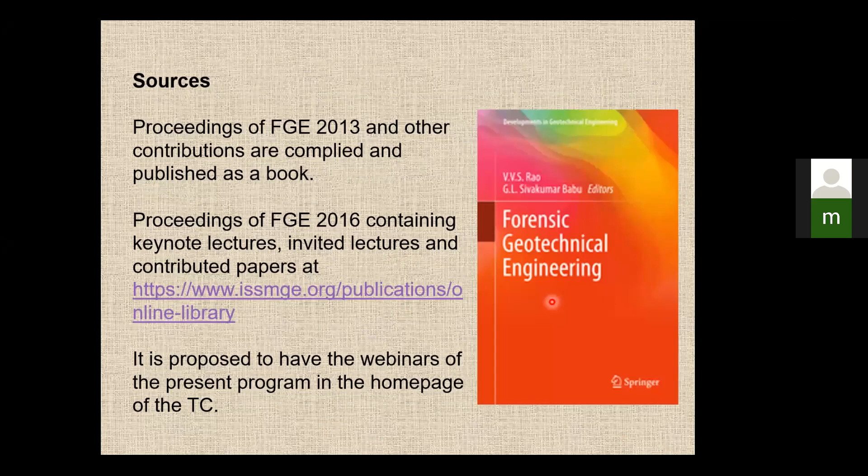So what do you mean by this forensic engineering? Okay, so forensic relates to the forum or the marketplace, belonging to courts of law, pertaining to... the issue is that

Like if it is something which is public, so people try to make some noise. If they want to talk, they can talk. I can keep quiet. Okay. Yeah.

Okay, thank you. So the thing is that forensic is something that is more connected with the public. So they try to discuss it in the court of law, and it has a legal framework, and there could be discussions on what went wrong, why is it, and who is responsible. So that is called forensics or forensic engineering.

So forensic engineering is nothing but engineering connected with assisting the legal system with fact finding. Because the legal system alone cannot identify what went wrong, because it's technical work. So the engineers have to help them understand what is this failure, why it has failed, what is the engineering failure here. That's a general thing, but ASCE has been quite proactive,

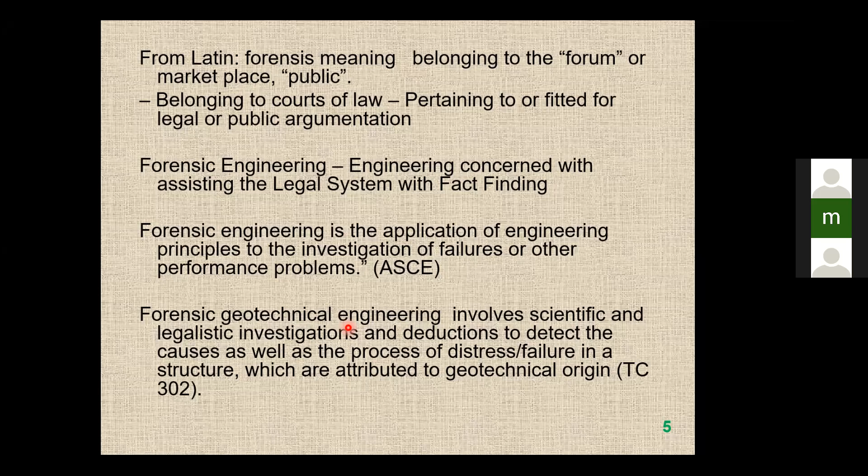So what is the difference between forensic geotechnical engineering and the normal thing that we do? It's called design engineering or design and construction engineering. In normal engineering, we design and construct. At least in geotechnical engineering, you try to find out, for example, the bearing capacity of a foundation, do some lab tests, field tests, get some parameters and all of that.

So you design the foundation, you construct the foundation, or it can be a dam, anything else, and apply some standard method of calculation of factor of safety, stability, deformation, and all of that. Finally you say the structure is safe from a design point of view, and the construction is done as per some guidelines, because design has to be translated into actual construction.

The design may be all right, but construction is very important. But ultimately it could fail. So why does it fail? Understanding that is called forensic engineering. Here the aim is to understand why it failed. So you do an investigation, then try to evaluate. Maybe you check the calculations and the parameters involved, say bearing capacity, c, phi, gamma, or settlements, E value or whatever.

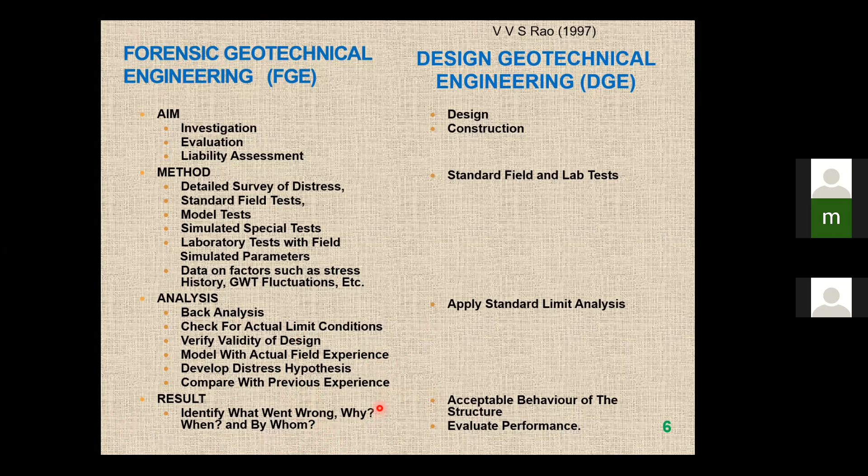So there are definitions of failure. Leonards is one of the persons who gave a lecture on investigation of failures. Based on his work, he gave what is called the Terzaghi lecture in 1982, and then he even suggested the formation of a group of members, like a forensic engineering committee in the US, and he has been responsible for the

So this is some difference that we expect, but we try to then warn them that, okay, let us not do that next time. So you try to do that. So failure is defined as an unacceptable difference between expected and observed. So the next thing is that the factors of failure affecting the safety involves

Okay. We have seen a lot of failures like collapse, complete failure, whether it's a landslide, a road failure, or an embankment failure. We have seen this. Okay. Functional failure involves a compromise of intended usage of a structure or facility.

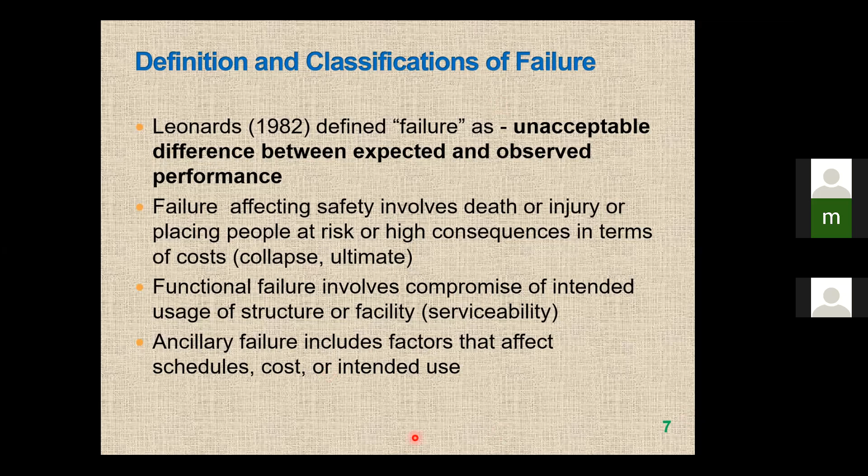Then there are a lot of other failures, like cost failures. The cost could be maybe 1,000 crores. Now after 6 months it becomes much higher, a 10%, 20% increase. All of that, or even intended use. Actually, we have seen many times in India that they do something but it's not used, like complete misuse of the actual purpose.

So people have been tabulating the type of failures and what are the reasons. One is called design deficiencies. I've seen a lot of failures in design. Unfortunately, the design is based on certain parameters and certain fundamental principles, like you assume some mechanics. For example, there is a slope failure, assumed a slip circle failure, but there is no slip circle failure at all. It may be a planar failure because the sand is somewhat loose, and slowly that loose sand comes out. So design failure is possible.

Okay, that is high. Then site investigations. Most of the time in India, geotechnical investigations are very, very pathetic. I don't know how many people are there in this course, but insist on good geotechnical investigation, whoever it is, because you don't get it properly. And not only that, the soil is quite complex, not like steel and concrete, where you can test them repeatedly and get parameters like yield, modulus or compressive strength.

It is very, very tricky in soils, because it's not a continuum like steel and concrete. Concrete and steel are treated as elastic, but in soils, because of the presence of pores, if the porosity is 30% or 20%, it makes a lot of difference. And there is pore water pressure in the pores. You don't have such problems in steel and concrete. So the selection of design parameters is very, very important.

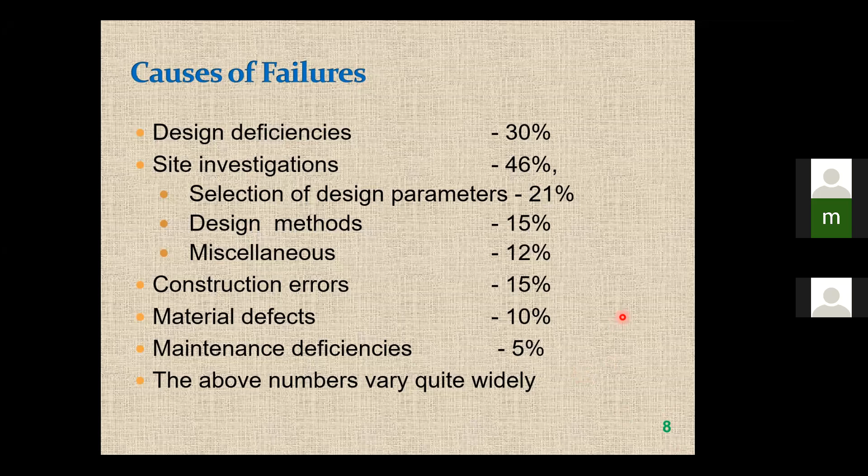One more thing: I understand that you have a test in this course, and maybe you should think of some questions on what I've covered so far, like what types of errors you can have in forensic engineering, what is the difference between actual engineering and forensic engineering, and can a normal engineer become a forensic engineer?

Because I have met some design engineers who don't know design very well. Then they went to construction, because in construction you can get a lot of money; construction margins are higher, while in design the margins are very low. So he was good neither in construction nor in design, and a lot of problems were there. So what I meant was that design engineering is different, and forensic engineering is different.

It needs experienced persons and a lot of fundamental understanding of the subject itself; then you can do a forensic analysis. Otherwise, nowadays with all the software-generated designs, one will not have a feel for the actual mechanics and can't visualize completely what can go wrong, so it could be difficult. So that's an issue. As a part of forensic geotechnical engineering, we suggested some steps.

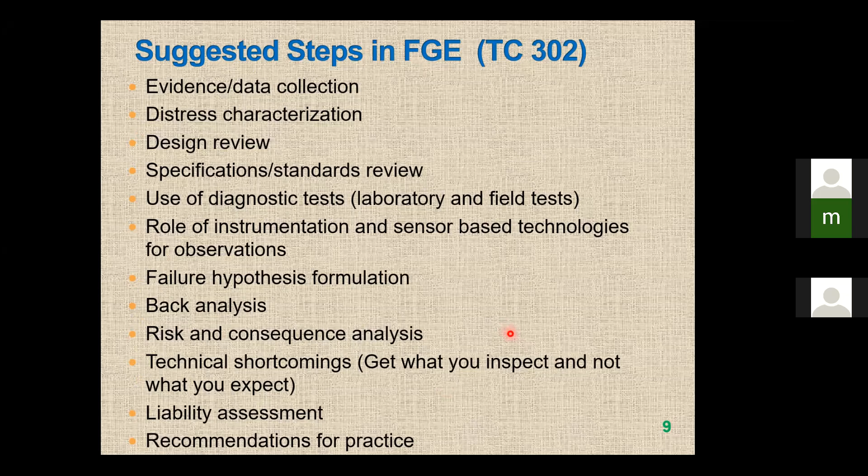What I will tell you about is landslides, then some studies of landslides in Kerala, Kodagu, Maharashtra, then retaining wall failures, RE wall failures. What do you learn from failures? Natural versus human-induced failures. The need for a good organization. PWDs are there, but their design cells are very poor, and it's very pathetic. So what is the engineering education that we should do? It's good that this course is being conducted. This is one good course.

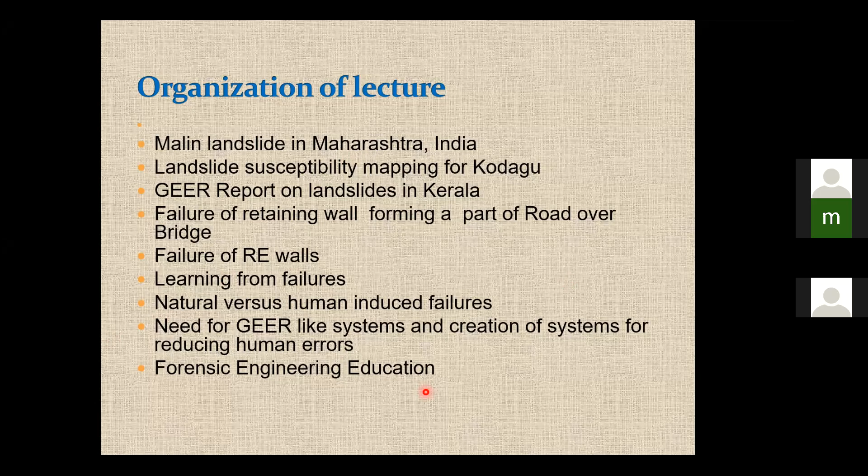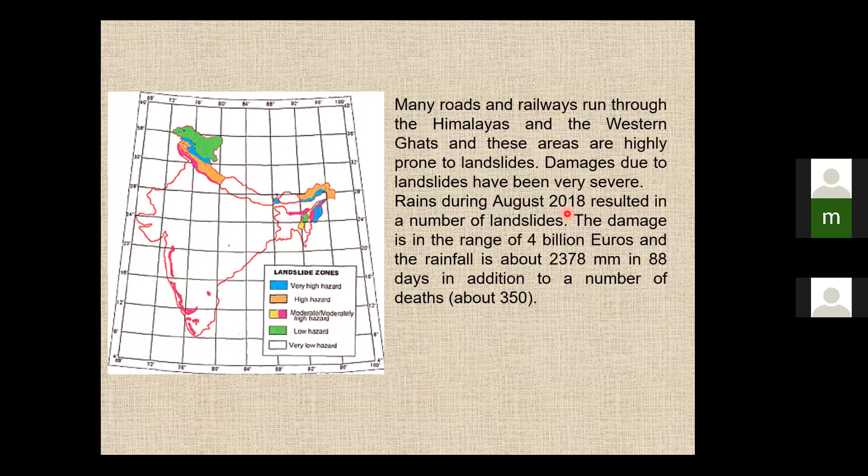And what are landslides? We know that many places in India are landslide prone, for example, the Northeast, then the north side, and then the Southwest, particularly Maharashtra, Kerala, Karnataka. So there are a lot of landslides, and in August 2018, it was supposed to be a 100-year rainfall. It had a lot of landslides, and the damage was quite extensive.

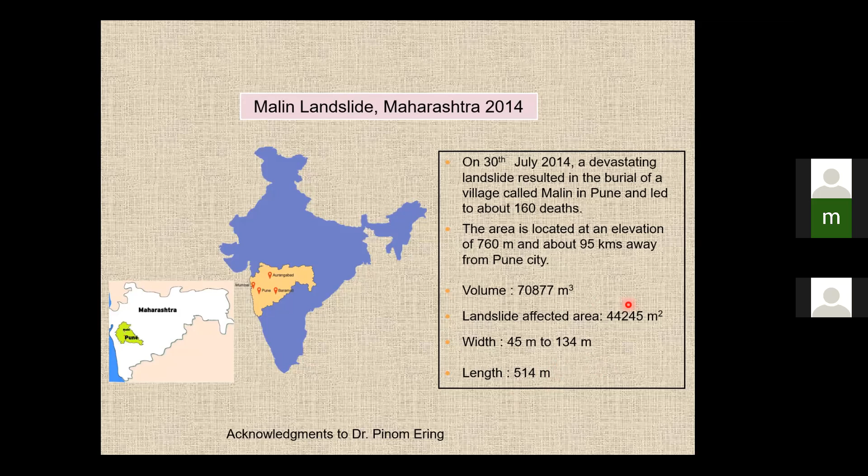I'll talk about one old landslide. This is in Maharashtra state, and the length of the slide is about 500 meters. The width is nearly 100 meters or more. Landslide affected area 44,000 square meters. The volume is quite high. It just came like this and completely devastated the village here.

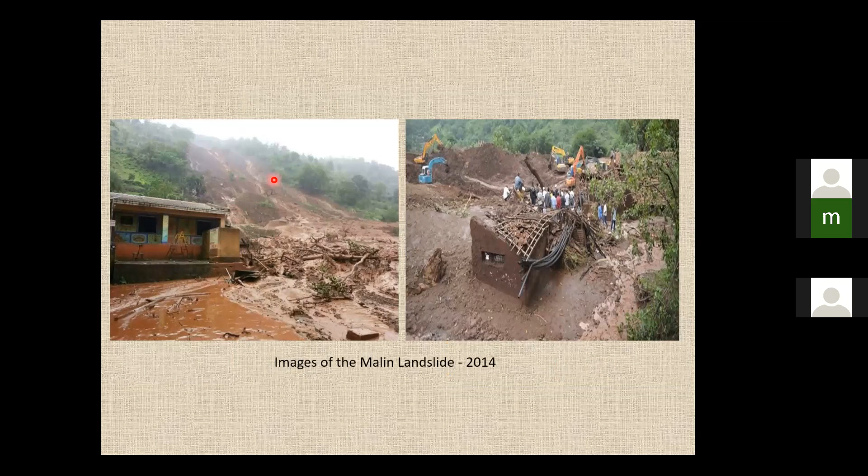And you can see the brick houses, mud houses. You can see, because people were living next to the landslide. They were not supposed to be there, but they were there because they were growing crops on the landslide. They didn't know that it was a landslide, so they were growing a lot of paddy there, and they were living next to it, though they were told not to be there.

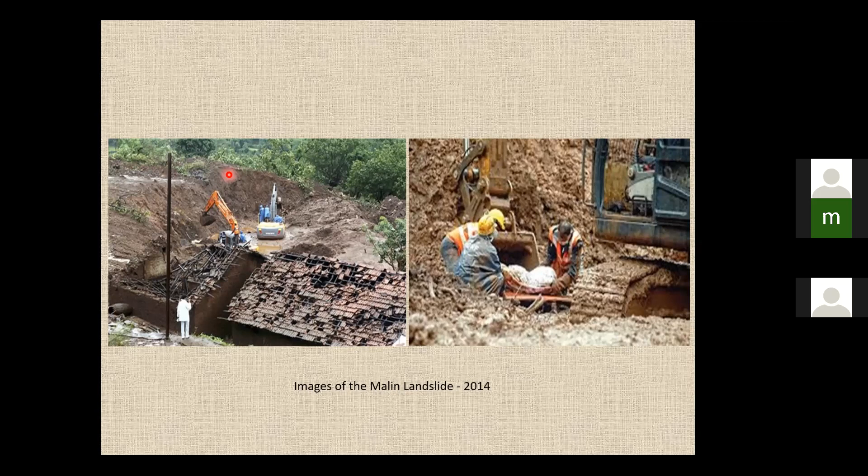So the landslide occurred early in the morning when the residents were asleep, morning 7 or 8 o'clock, and the landslide was noticed by a bus driver who drove through the area and saw that the village had been overrun with mud and earth. The complete area, all these houses. There are so many houses you can see here, right from top to bottom. All got washed away completely.

None of these houses were there even when I visited the site. And 150 or 160 people died, right, in a small village. And so what was the reason? It's rainfall in this landslide. Continuous rainfall for the previous week and heavy rainfall for 3 consecutive days, most likely the triggering factor for failure.

There are no seismic events. Why we should know this is that sometimes in places like Sikkim and the Northeast, you'll have rainfall as well as earthquakes. So you have to make a record that there are no seismic events there. Rainfall continued after the landslide, making the operations difficult, because that leads to more deaths, is it not?

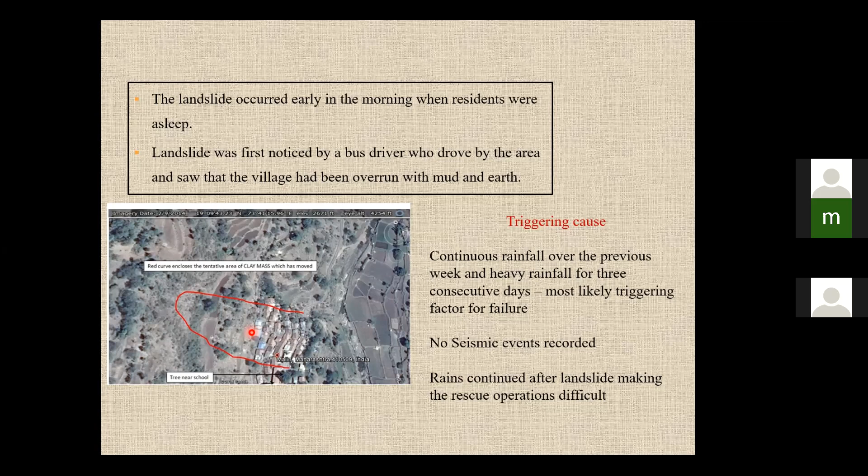So if you want to look at failure analysis, you have to find out all the details. So I have shown some steps here. I picked up a few of them, trying to explain the collection of data, distress characterization, development of failure hypothesis, field and laboratory tests, back analysis. Okay, we thought we'll do up to this.

All the 6 steps can be done, but it is quite expensive, and it is not something some professor sitting in the office can be doing; it should be done at a government level, with more complete involvement by the people involved, like IAS officers and the district administration.

Right? If you want to do a failure analysis, actually most of the time what happens is the failure occurs, somebody goes and gives a report, and after that there will be a big proposal next time to do something else, right? So we don't learn from failures.

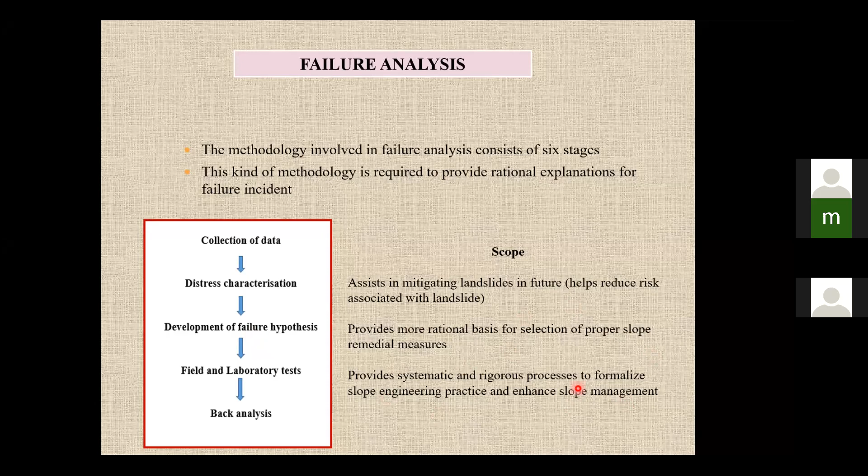So here the scope is to assist in mitigating landslides in the future, provide a more rational basis for selection of proper slope remedial measures, and provide systematic and rigorous processes to formalize slope engineering practice and enhance slope management. This is the scope that we are trying to do here.

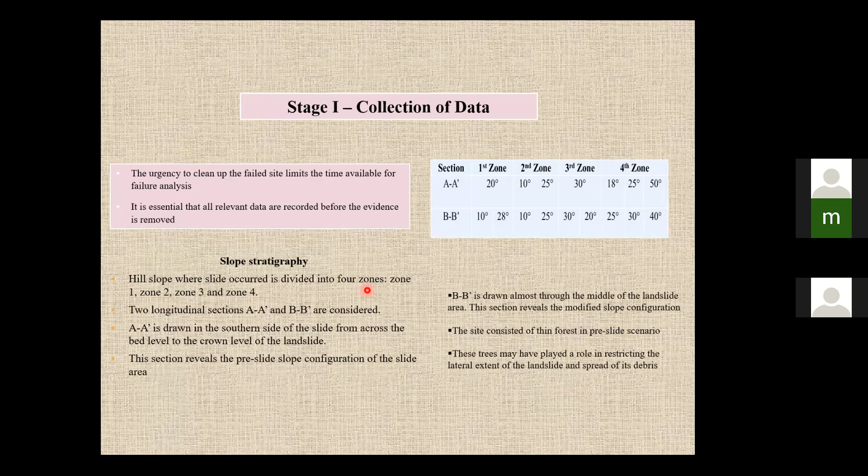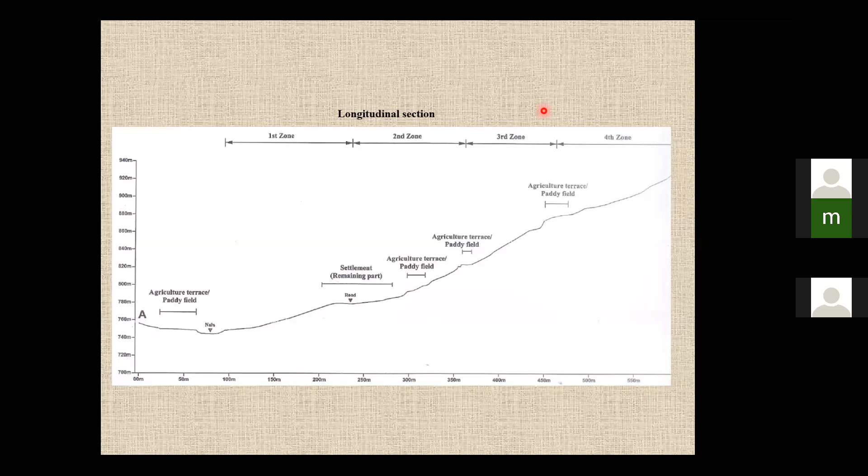So people were supposed to be somewhere else. Then they thought that this area is good for agriculture. They came here. They also wanted to be next to the paddy fields, but they were asked not to be there. But the choice is theirs. So it has happened. So the rainfall event data was collected. The rains came from July. It was there for a very long time.

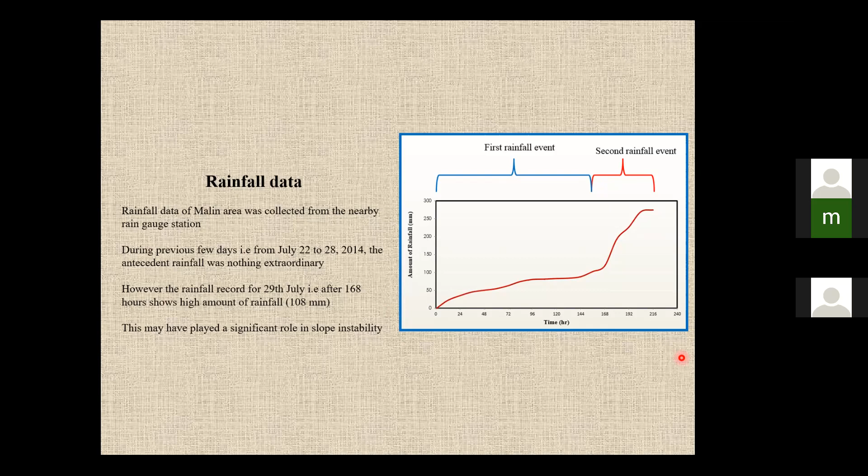So the distress characterization was that maybe 10 years before, there was some distress. There was a village. There was a problem, and there was indication of landslides. Villagers were evacuated to an adjacent area and housed in specially erected shelters, but they returned to Malin village, which led to the large-scale casualties.

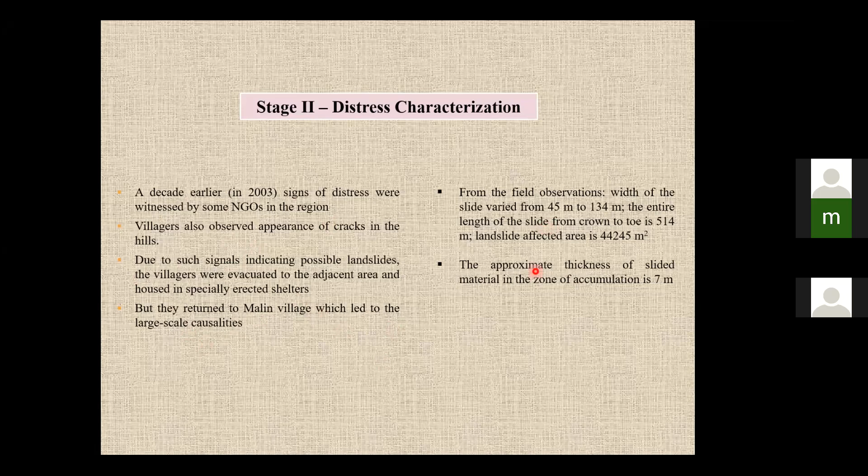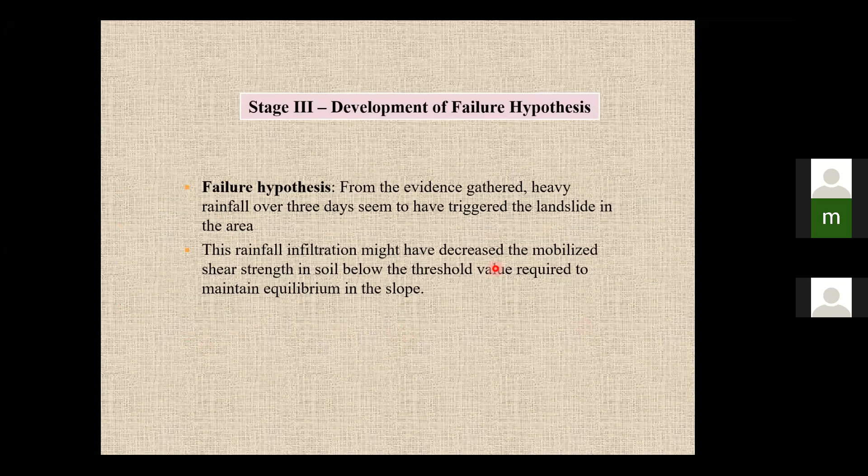Okay, so this is a landslide 7 meters thick. Actually, the failure hypothesis was that the heavy rainfall led to the problem. But if you want to analyze it, the rainfall must have decreased the suction below a threshold value required to maintain equilibrium of the soil.

So you have the soil properties here. You have the Van Genuchten parameters. In fact, Van Genuchten parameters will give you the soil water characteristic curves. Soil water characteristic curves are very, very important for understanding the rainfall in the landslides. So Van Genuchten parameters is one way of characterizing the soil water characteristic curve. So we got some test results, like all of these parameters and all of that.

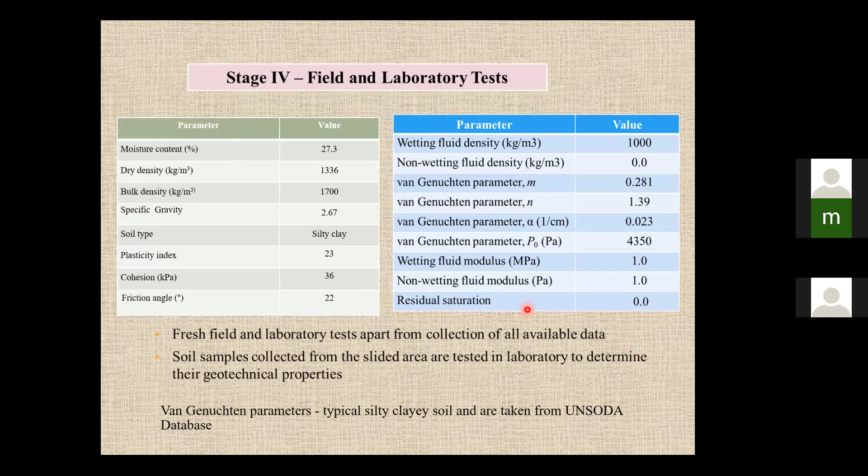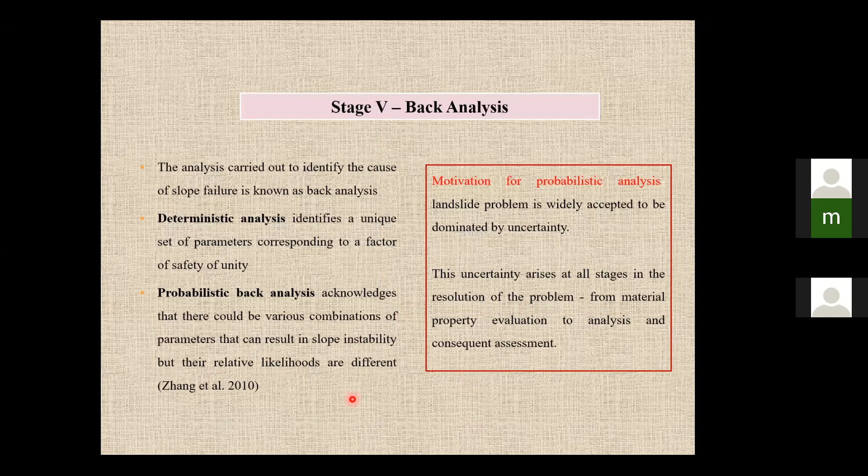So we did back analysis. The motivation for the back analysis is that you have to find out the set of parameters that led to failure. And we also did what is called probabilistic back analysis. Why? Because there could be many combinations of parameters that can lead to instability. That's what we want. So we did a numerical analysis, probabilistic analysis. It's called inverse analysis. Like, given that there is something wrong, trying to understand what is wrong is called inverse analysis, right?

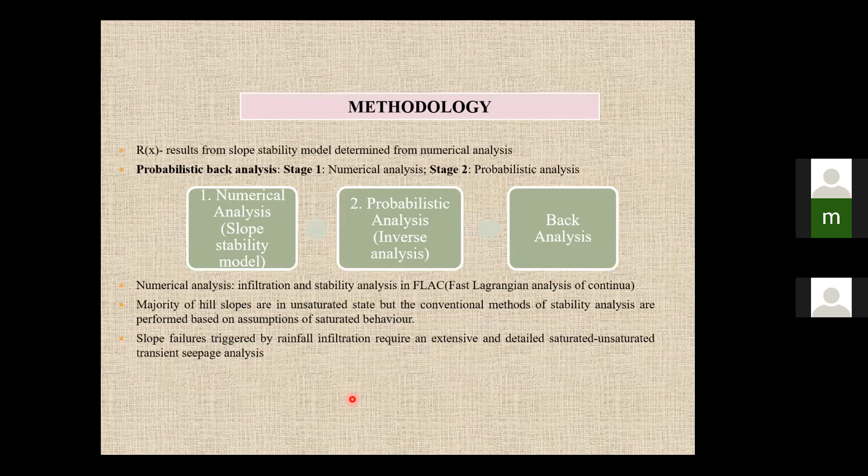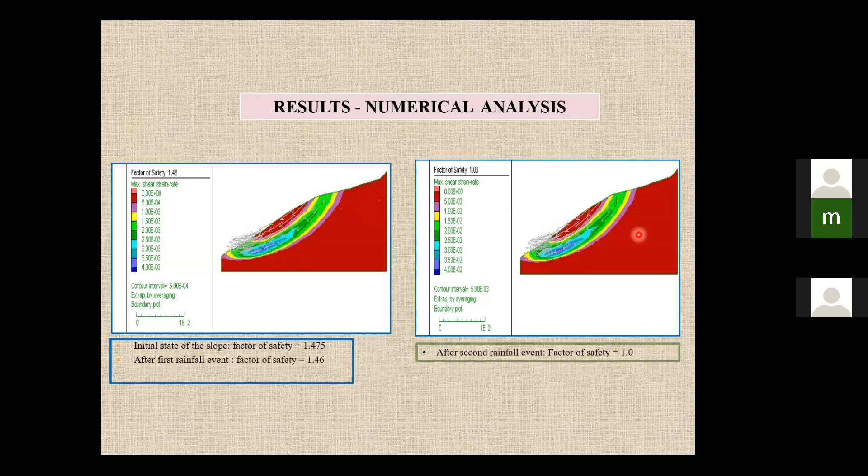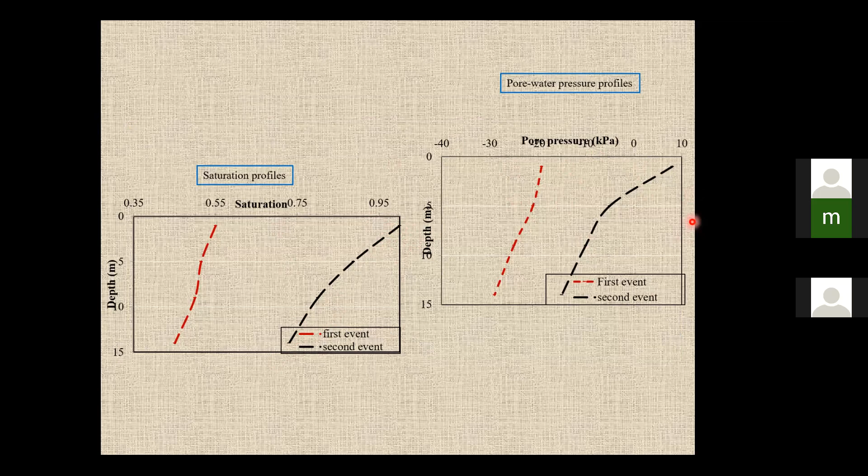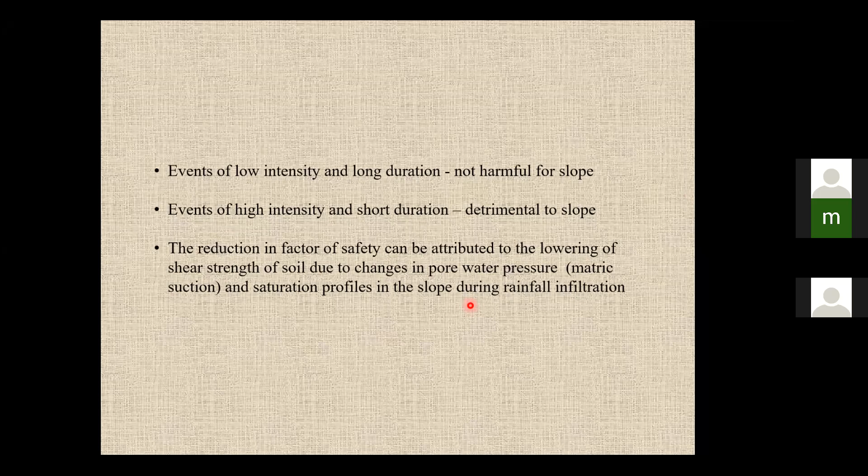So there is also some understanding. So what we said is that the events of low intensity and long duration may not be harmful to the slope because there is drainage there. But if you have high intensity and short duration, there is a problem of drainage, and pore pressures do develop, and the shear strength of the soil comes down, and there is a reduction in the factor of safety. Right? So we did all of that analysis.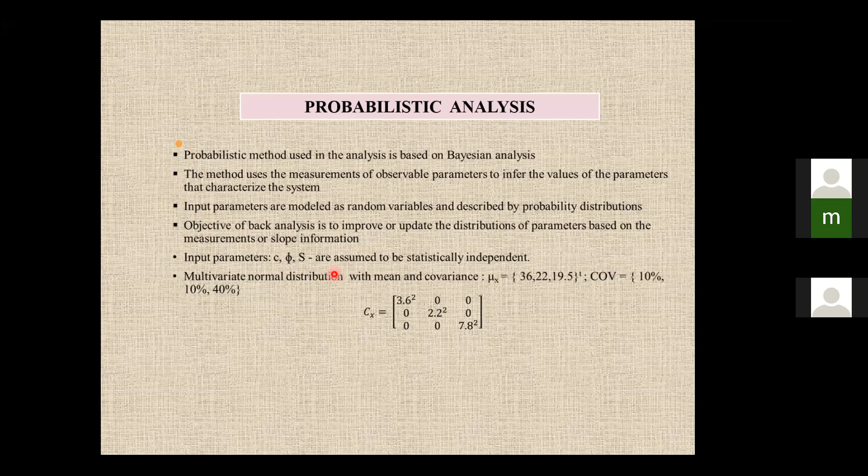These are all the parameters of the soils, like input parameters, cohesion, friction, suction. Suction is supposed to be negative pore pressure. Because if the negative pore pressure becomes positive, then there is a problem. So we did this sort of analysis, and we find that there is a need to evolve comprehensive protective and predictive mitigation strategies for disasters. This is valid everywhere. Actually, I have not seen many other back analysis and landslide works in India. Actually, ours is one of the existing ones.

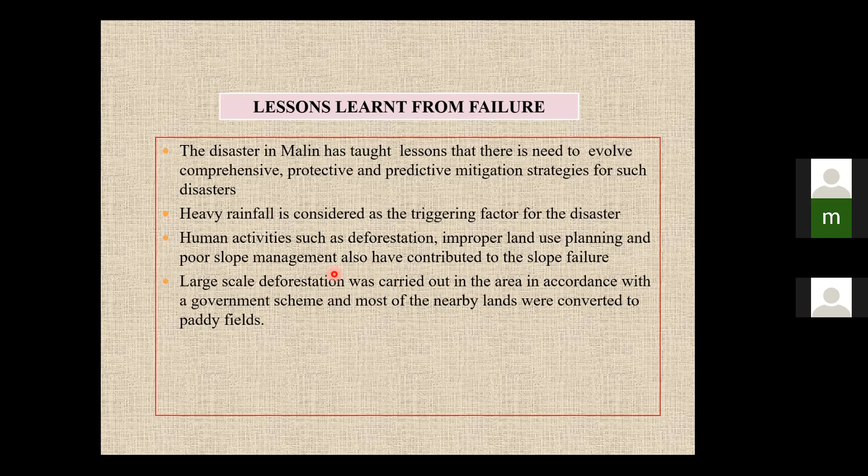And if you want to do proper work, it's important, like improper land use planning, slope management, deforestation. All of these are also responsible. That comes more into planning of the hilly areas. And if you don't plan well, you will have problems. And even early warnings, they had an opportunity to put them in, but nobody bothered. And one can monitor inclinations, deformations, pore pressures, particularly when people are staying close to them.

Actually, the one way is the rainfall. What happens is that certain rainfall causes this landslide. Not all rainfalls, right? So there is a threshold rainfall. So we have to find out the relationship between rainfall and landslide occurrence. Because rainfall is a load on the system, and if you don't provide proper drainage, then a landslide occurs. So the rainfall is something that we should be able to quantify. That's why design is a matter of providing proper capacity for the loads that are coming, right?

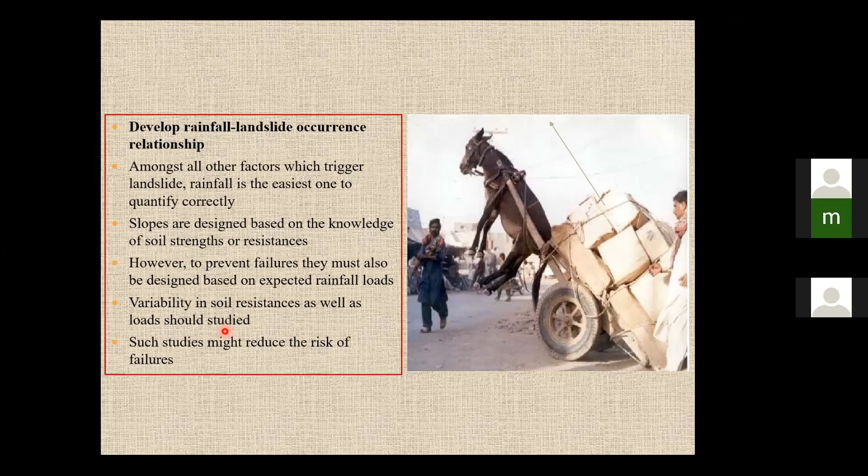So in fact, people have done a lot of studies on this. Like if the duration of the rainfall is more than 1 week or 2, 3, 4, 5, 6 weeks, or if the cumulative rainfall you measure in a particular area is 200 mm, 300 mm. So if you plot it in a landslide prone area, they have plotted a line which says that above this line, they had landslides. So for example, here for 1 week, if the total rainfall is, say, 200 mm, definitely a landslide would occur in that area. That's what it means.

So that is called Caine's threshold. This line I mentioned is called a threshold. And if you know that there is a lot of rain, then definitely you can say that landslides are there. And of course, this is known in a given locality, which means that it has to be fine tuned. We did that type of analysis here. This is Caine's global threshold. This is a red line. This is a dotted line in this.

Actually, we took the data of a particular state, Arunachal Pradesh. We also got this equation, and then we have 3 landslide events here. Okay, so it clearly shows that the actual threshold is somewhat different from what the general one gives. So you can see that the equations are completely different. Caine's is I = 14.82 D^-0.39, whereas in this case it's 43.5 like this.

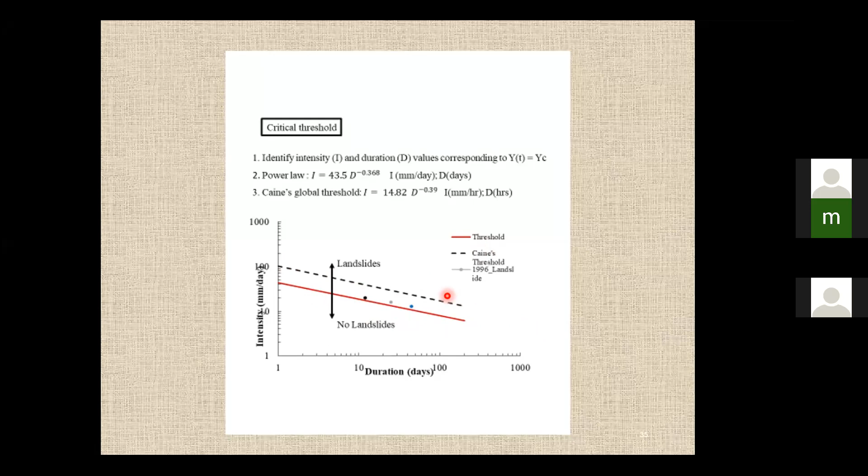So you can see that here, the line is here, and these 3 are above, which means that landslide occurred. Had you used this same thing, only the Caine's one, this would have occurred. That's what it means. Okay, that is the importance of threshold levels and all of that. Okay.

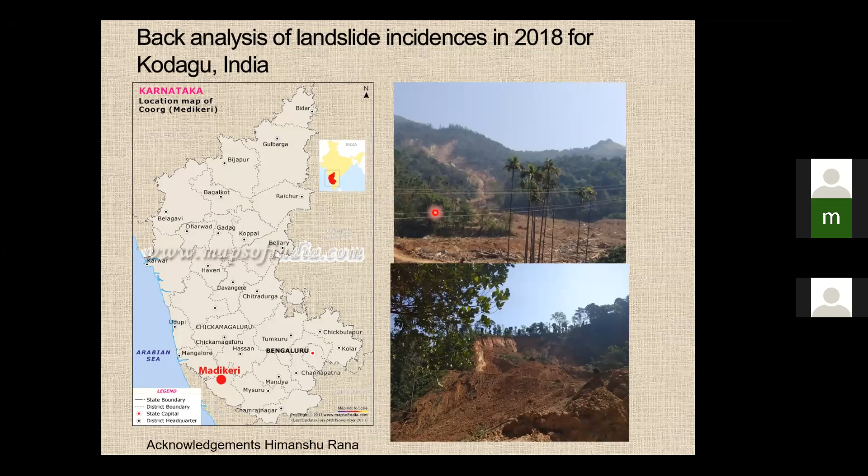So this is another one in Kodagu, again, one of the popular destinations in Karnataka. People love to go to the Western Ghats here. Again, a lot of landslides. These are all typical examples, and again, very, very expensive. So what we're trying to do is look at a district level. What you saw just now was about one location, but people have to do it at district level.

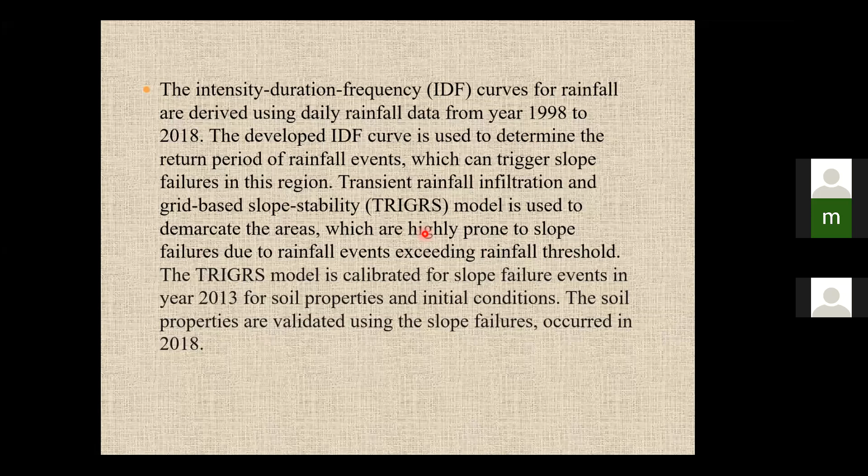See, the thing is that suppose you have a district in Himachal or a hilly area, the district collector, all people should be a little more sensitive to those things and come up with models and calculation procedures and even help rehabilitation measures, because people suffer because of this. So we did some sort of analysis based on that.

This is for one of the districts in the year 2013, and you have the 2018 landslides. So we are trying to see that you had only 3 landslides in a particular area in 2013. But then in 2018, as I just mentioned, the rainfall is very, very high, so you have more landslides.

So we use this type of data for calibration, because if you have data for 20, 30 years, like this year this much rainfall, how many landslides in the same area. It's somewhat empirical, but at the same time good enough for planning in a district which is prone to landslides. For example, in any district in the north, like Uttaranchal or Badrinath, you can do this type of analysis, and it gives you a lot of information.

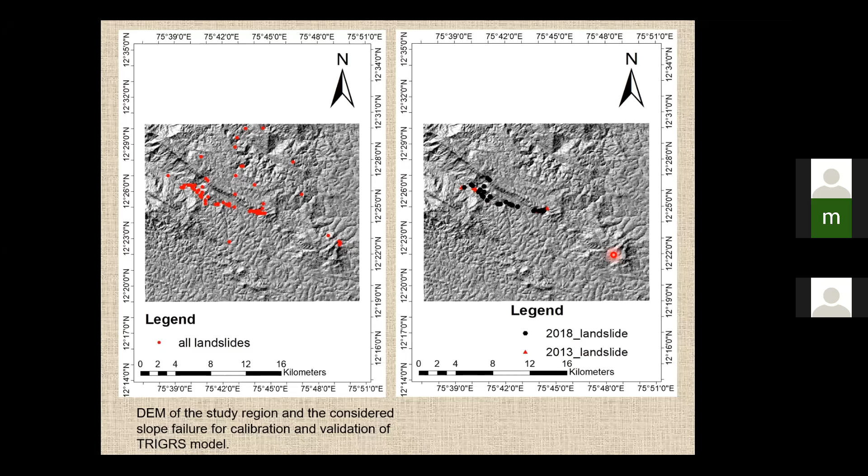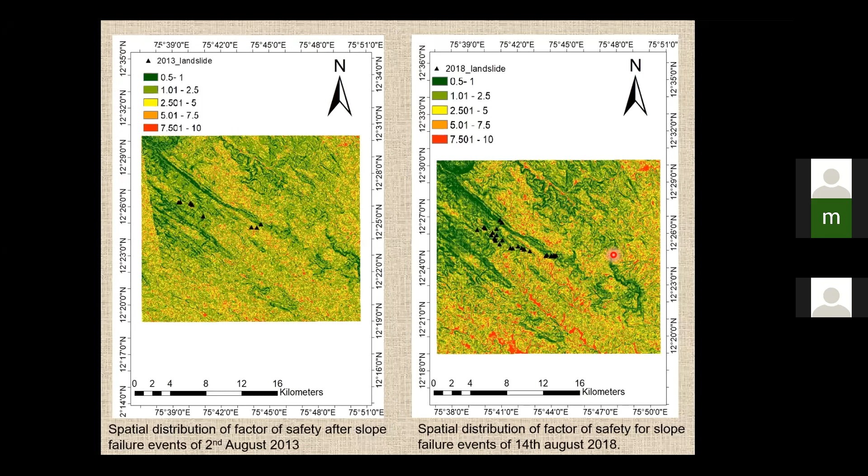We are calculating the factor of safety using the TRIGRS method. There's a method for that. The other important thing I want to say is that when the 2018 problems came, they have in the US the Geotechnical Extreme Events Reconnaissance group. The moment this problem came in Kerala, within 1 week, 3 days, they all came, did the survey of the whole area, and prepared a report. The report took maybe 15 days. That's it.

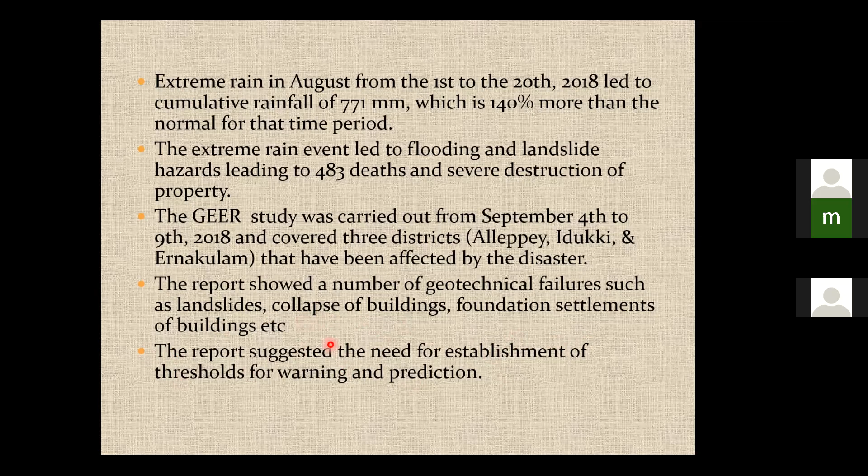So that particular report was very good. The rainfall was 140% more than normal, that's what they say, and it led to 483 people dying. The GEER study was carried out over 5 days they were here in Kerala. They covered 3 districts and completed the report. The report shows the number of geotechnical failures such as landslides, buildings, and all that. It's very interesting. But we have never seen this type of report here, though we have so many things happening regularly, right?

The problem that we have is that the efforts that we have are all disconnected. I don't know whether they're efforts, because for the same slide, I know 10 people who will visit, and those 10 people are not connected. You'll have a team from Government of India, a team from some other ministry, some other team from local activists, some picnic people, all sorts of things. But nothing gets connected, and the problem stays there. The sporadic attempts are the same.

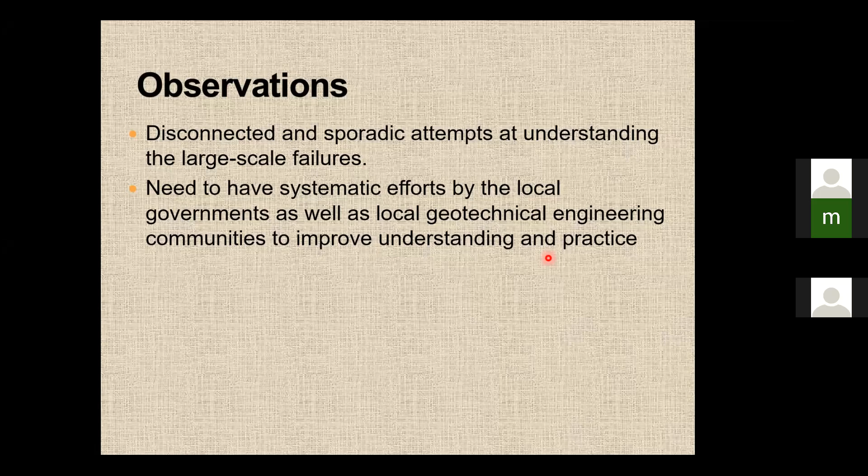So there is a need to have systematic efforts by the local governments as well as local geotechnical communities to improve understanding and practice. Geotechnical engineering is not disconnected from hydraulics or something. People have another problem in civil engineering, that there is no dialogue between a geotechnical engineer, a structural engineer, a water resource engineer or an environmental engineer. But failures continue to happen, so that is not correct. People should really work together.

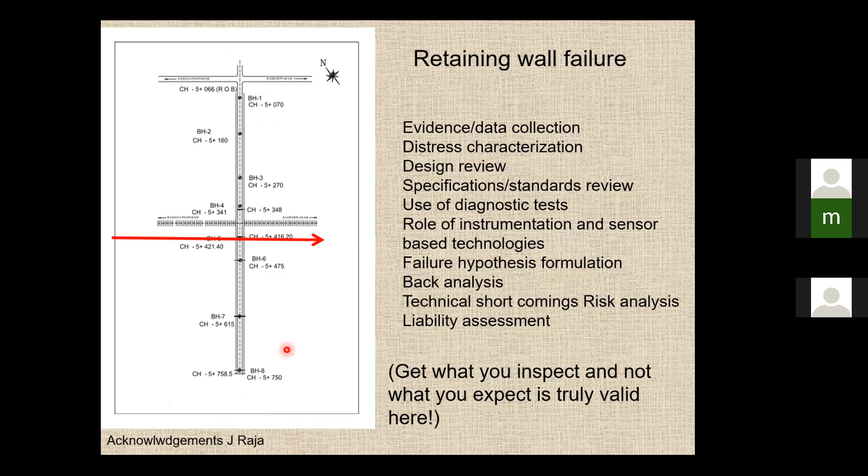It completely collapsed. If you go to the bridge, there is a lot of tilting, the pavement is gone, and all of that. You can see overturning of the wall. If you measure the overturning, with a very crude way of measurement here, it's about 800 mm. We studied overturning failure in the subject, but you can see all of them here.

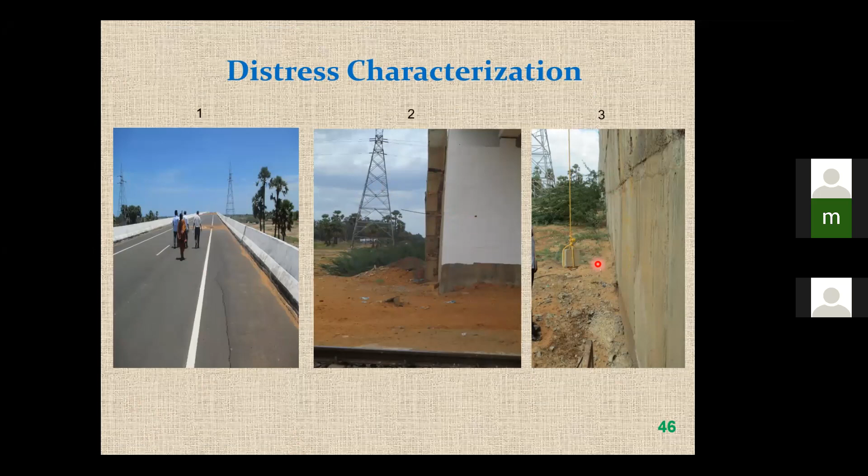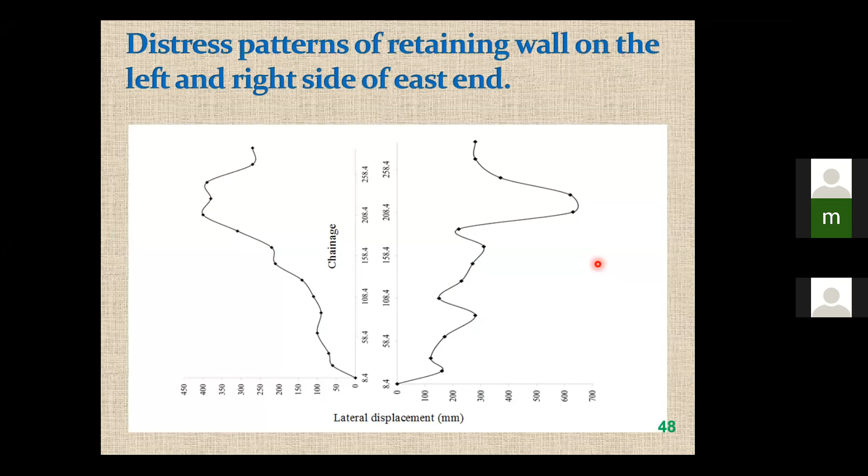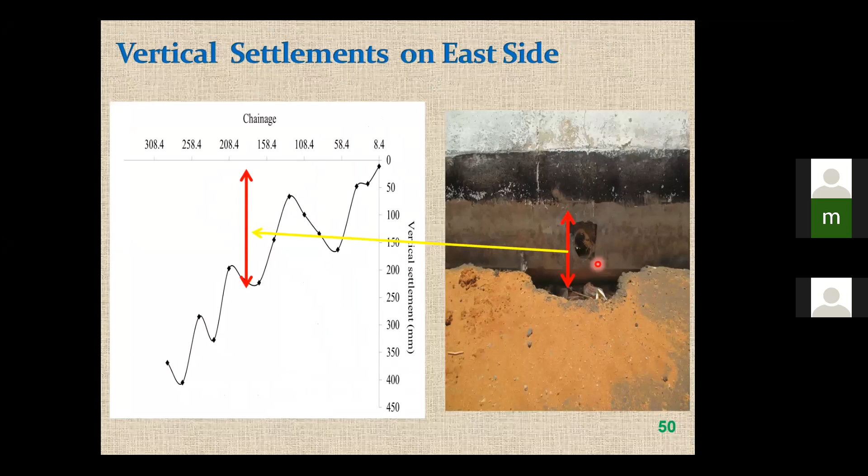So we measured the SPT values of the materials and all that. We find that the compaction is not good. We monitored the movements. Movements are quite alarming on all four sides, the west side, the east side, south side, all of that. The settlement of the road was about 200 mm, because the road structure sank, the vertical settlements.

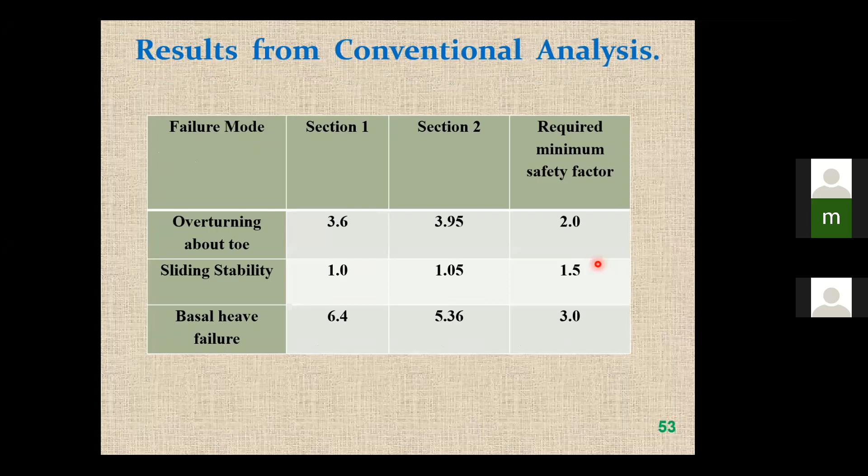So we did analysis, and we find that it failed in this manner, which is actually close to what we observed in the field. For vertical settlement, 342 is what we saw in the model, but 327 in the field. So reasonable agreement is there, at least in terms of the mm. And we clearly see that the factors of safety are quite low.

So actually, funny thing, let me just highlight. We do all design checks: overturning, stability, sliding, bearing capacity. But in this case, it says the factor of safety against sliding was less, but it didn't tell about the actual failure mechanism.

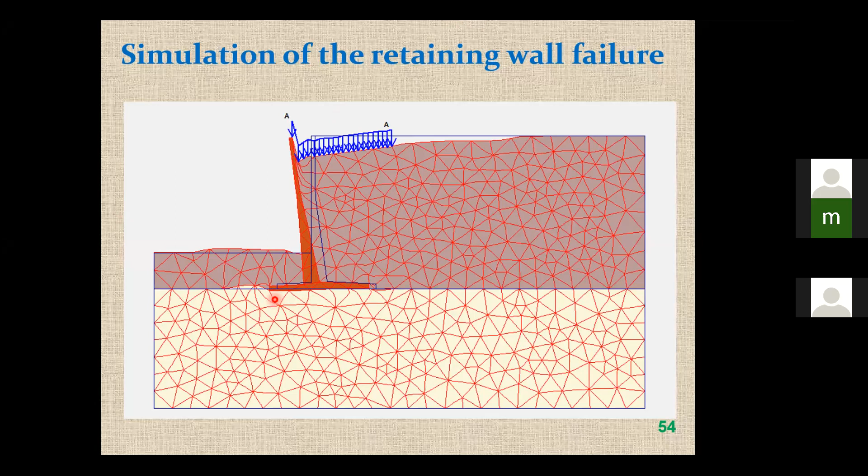What has happened is that there is a little bit of overturning. Though the overturning factor of safety was good, it didn't tell us about overturning. But actually, what happened was overturning. So what I meant was that in our design procedures we don't check properly. We just casually do that, and the soil compaction was not good. All of this was there.

One important thing was that about 8 crores was the cost of construction, and after construction it failed immediately. Then for 2-3 years nobody went that side because people were worried that something else would happen. It's actually a bypass road of 700 meters, but then somebody said, can it be repaired? Because you can't demolish it, since a lot of money was spent, and if you demolish it, who is responsible for the 8 crores?

So somebody was looking for a repair work, and somehow I stepped in, and we did repair of the whole thing. Of course, this is not part of this presentation. The conventional thinking was that you demolish the structure and reconstruct. It would have cost 8 crores for demolition. The road failed, everything failed there. But we could repair it in 3.5 to 4 crores, so that was a very nice one. It is now working.

So as I said, the failure was essentially a design failure here. Backfill compaction was not satisfactory. Use of proper design analysis methods is required for general practice and profession. The other problem was that they prepared the DPR, and whatever design was in the DPR was used for construction, and no detailed design was done at any time.

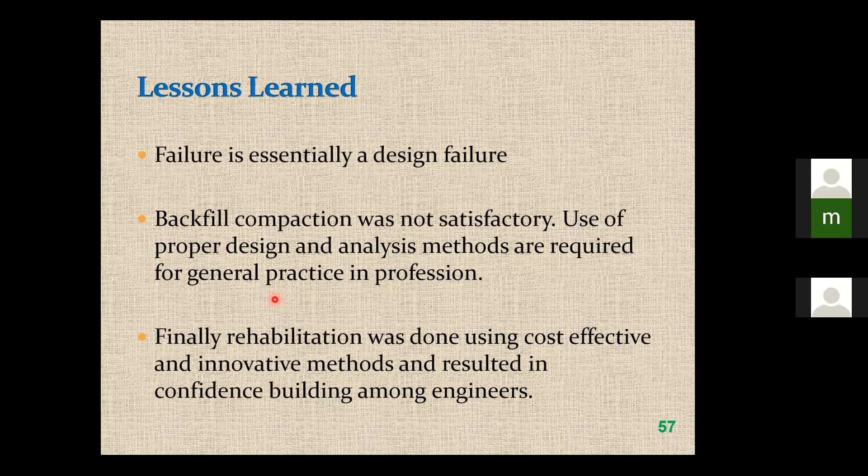RE walls are very standard in India, but the failure rate is very high. Quality of construction is so bad. There is a 1% failure in the Indian scenario, like out of 100 walls, one will fail, which is actually very high. But worldwide it's also the same thing. If you look at the worldwide statistics, it's not very different. Maybe in India it is more.

Maybe you can say a little more than what they have, because we have many contractors doing the same work without knowing what they do. There are 20 contractors, but out of them only 4 or 5 are good, and the others are all duplicates. We have seen them. That's a problem. So it goes for failure.

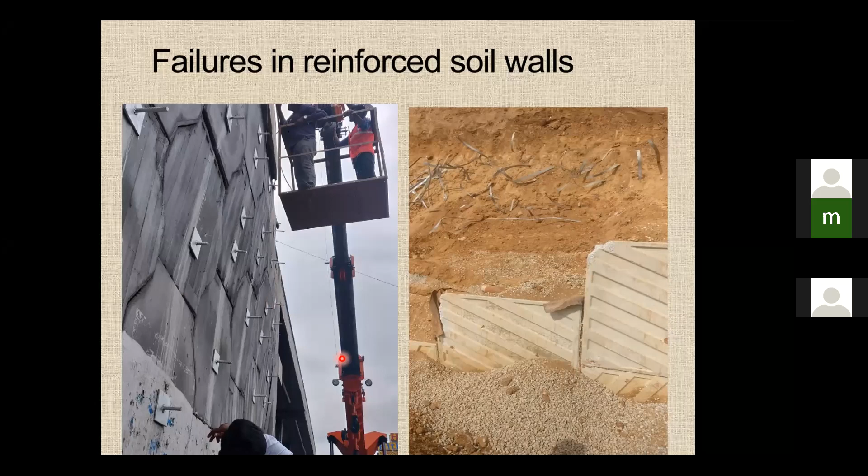So this type of failure... You're all very active on WhatsApp circulating failures. I'm sure you think that you're serving the profession by circulating WhatsApp messages on failures. It's good, but we should look at failures and understand them. We have a lot of responsibility to society.

So here we have seen again a big flyover just 3 years back. It failed like this. All this came down like a pack of cards. So we had to rehabilitate it like this. What I meant was, again, it is a design failure. It's a connection failure. Actually, it needs a 1 hour lecture on this: what is the problem with RE walls? Which actually I'm giving tomorrow to somebody.

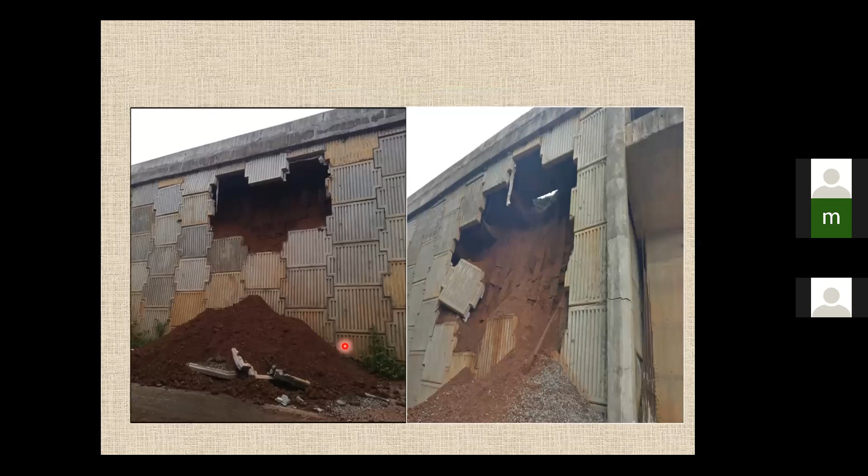Okay. Yeah, this is another failure. This is quite common. I mean, kindly send some information if some of you have it, with reasons for failure, what you understand. I welcome it.

So some of the failures in RE walls are because of the lack of understanding of design principles and quality control. They don't understand the design principles. Poor connection design, poor backfill quality, the compaction is not good, inadequate drainage provisions, and inadequate quality control. Then common communication gaps between engineers, contractors, and material suppliers.

The engineers, government engineers, are not very familiar with the design. We have some people who supply geogrids and all the material, but after that, they don't take any responsibility. Contractors who do not know, who want to cut corners everywhere, are there. They don't want to do proper compaction. They don't want to use good material, so they want to cut everywhere, right?

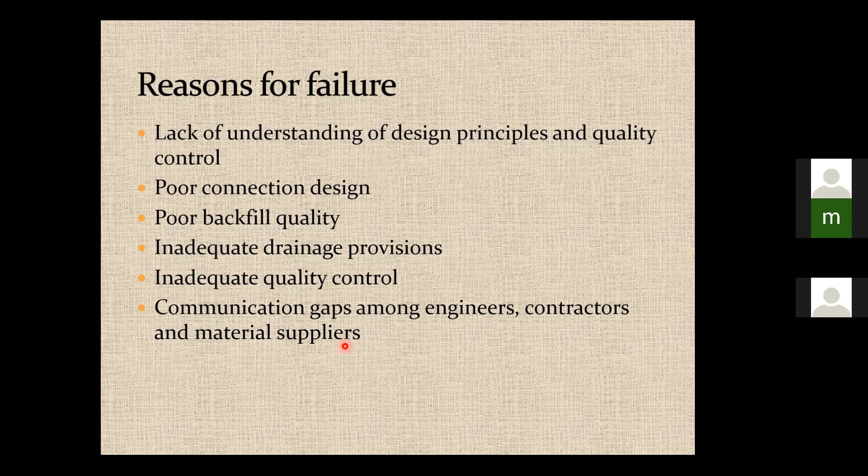Whereas the design is very precise. Everything has to be very good. You assume those things, but if there are gaps, communication gaps, then it leads to failure. So that's one thing.

So what are the issues here? As I just mentioned, the analysis of failures and learning from failures need to form an important component of engineering. Courses can be offered for students and professionals. Of course, we are doing it now. The advantage is that it leads to better design analysis procedures, better codal provisions. It saves a lot of money and brings accountability also.

There is a need to have an association of forensic engineers in each country who can collect failure information, analyze data, and provide technical opinion to support judgments. For example, you have the Institution of Engineers in India. You have the Institution of Civil Engineers. There are so many organizations. None of these professional organizations, including IGS, are doing any forensic engineering, though I have been pushing and working on it.

For example, Indian Roads Congress: why are the roads bad? Nobody answers, right? Why all this is required is that you need to interact with what is finally happening. The judicial system will punish the engineers. I know some judges who don't have good knowledge, and if they don't have good knowledge, the judgment will be wrong. So our engineering personnel should be able to understand what is required for correct judging. If it is not properly given, then it's a problem, right?

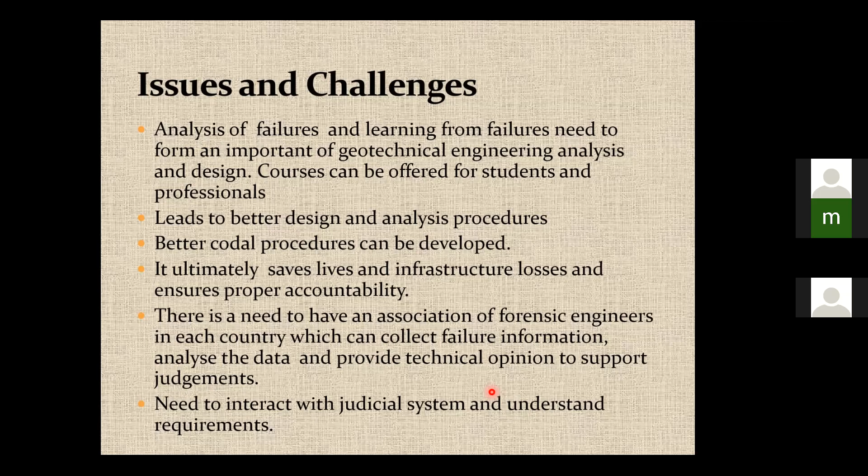I was also suggesting the courses here. It is possible in every subject, but I'm talking only about forensic geotechnical engineering. There are a lot of top-level lectures, because luckily now we have everything online and you have access to a lot of good material. For example, in geotechnical engineering, the need for investigation of failures, the Terzaghi lectures of Professor Leonards, Sowers. There are so many lectures that are available.

You can read that. Because, as I said, soil behavior is so complex, people should understand soil behavior. There are a lot of papers on basic physics problems, and a lot of work done on those lines. Even on this slide I can give one more lecture, because I taught this course. Bearing capacity of shallow foundations: if there is a failure, what did we learn? People came up with theories on how things can be avoided.

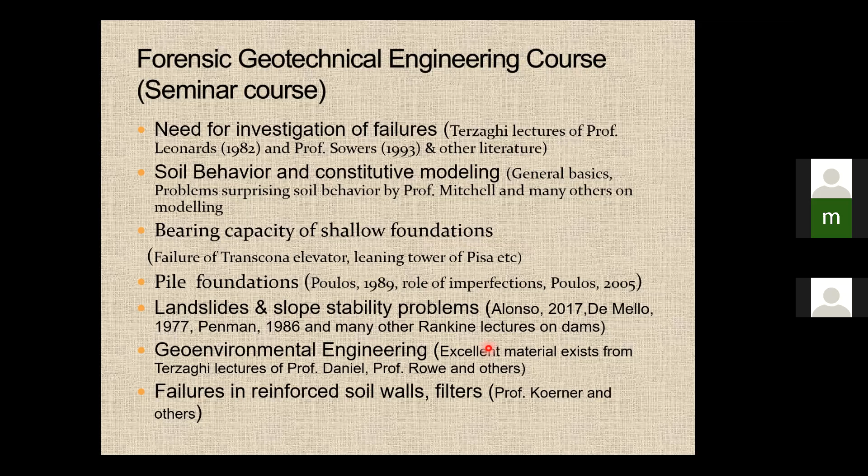There are a lot of failure theories on bearing capacity, shallow and pile foundations, landslides, geo-environmental engineering failures. There's so much one can really do, and the observational approach. Data analytics is coming up so much nowadays, but in civil engineering we are not encouraging it. So it is an opportunity for us to enforce the data analysis subject in engineering, like different types of design approaches, like the design safe approach.

There is a method where, even if it fails, consequences have to be minimum, the design safe or fail safe approach, they call it. Like the WTC tower in the US: because of the fire there was a collapse, an inward collapse, rather than it falling off somewhere and attacking the other buildings, so others didn't catch the fire, right? So the design safe approach one can come up with.

There are a lot of human factors in engineering failures, particularly in India, because we want a lot of labor, but they are not well trained. We want the same screwdriver for every small thing. We don't use proper engineering sometimes, with the result that there will be quality control issues. Continuous education and training is important, which is why we have a course here. Ethics are also very important. We don't have courses on ethics, right? In AICTE we don't have courses on some of these things. So a lot of issues are there.

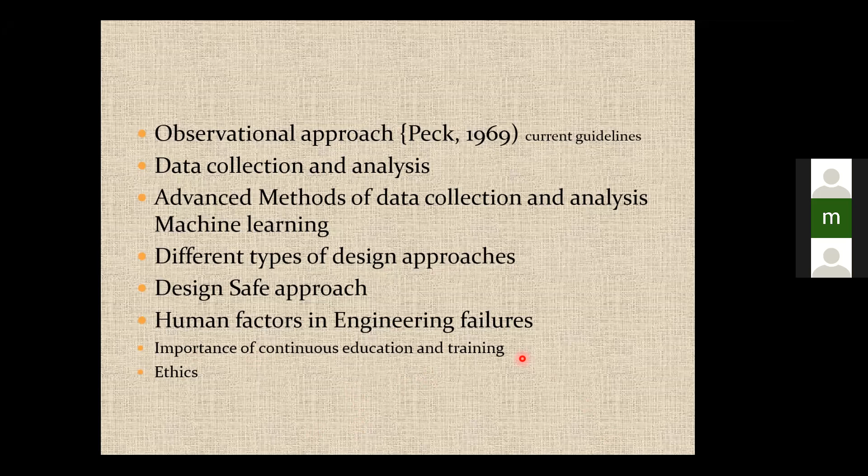In forensics, a lot of journals are also there. One nice one is the Journal of Performance of Constructed Facilities, ASCE. Very nice journal, you can see that. Proceedings of the Institution of Civil Engineers, Forensic Engineering journal is there. There are some papers and books and all of that. So this is what I want to say.